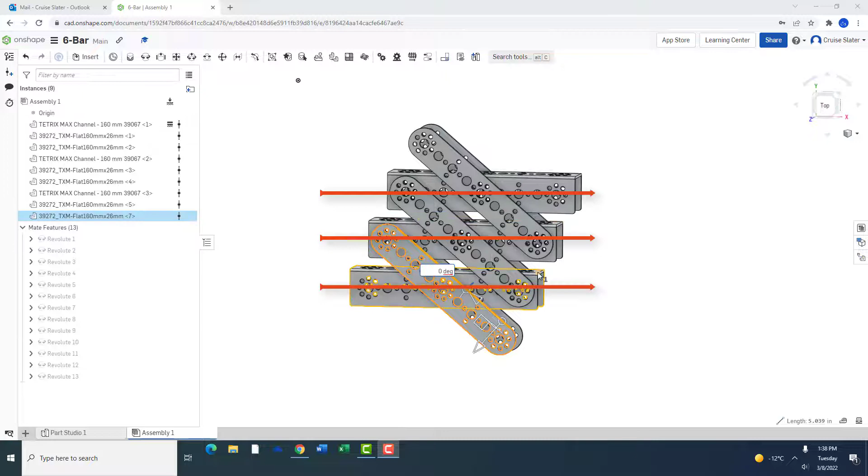And then I have 3 sets of diagonal parallel bars as well. And those bars are made out of the flats. Now, I don't have the washers and spacers and axles in here. I just have digital mates using Onshape. But the idea here is to understand the movement.

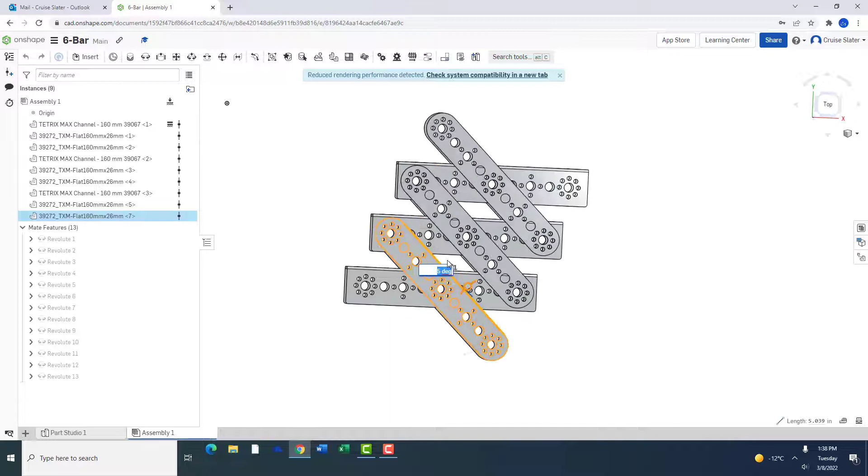So if I grab this piece right here and I use this rotational widget, we can see that the whole apparatus extends out. And the key feature here is that the diagonal bars stay parallel with each other and my horizontal bars stay parallel with each other. I will eventually reach the end, and in real life those would sort of butt up against each other and stop the movement. And we can see here that we have a minimum range and a maximum range.

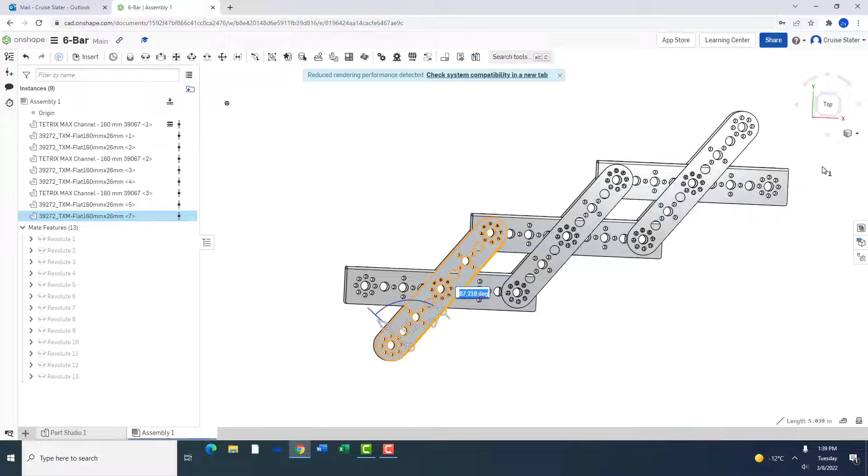So I can take something and build it compact, and then I could reach out and do something. So I can maybe have a gripper or a tool attached to the end over here. Alternatively, I could pivot this. I don't know if this will pivot it properly here. I could pivot it this way, and if I was to reduce the distance here between these two ends, so using my movement here again, we can see we can go vertical. So I could use this to operate some kind of vertical scissor lift.

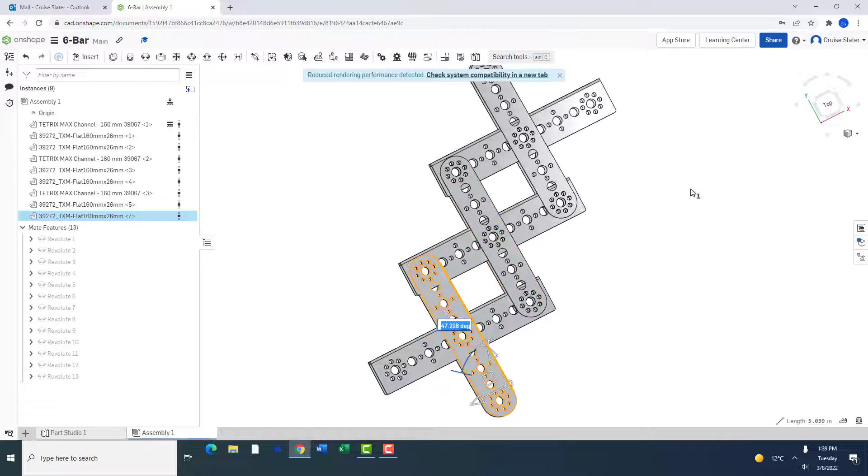I don't have it on the proper axis, but you can see that now my movement is vertical, not horizontal and extending out. So what are some of the key features here? Key features are symmetry. First time you're building it, it can help to imagine building it as squares. So if I rotate this a little more just to get that square shape, we can see that there is a symmetrical shape here. I get a square in the middle, followed by another square, and you can almost think of it like an accordion.

There are ways to build this without having equal shapes as you go through, so a more asymmetric approach. But as you do that, you have to be mindful of the loads that you're going to place on your system. So you have to think of torque and weight and what you're trying to do at the other end.

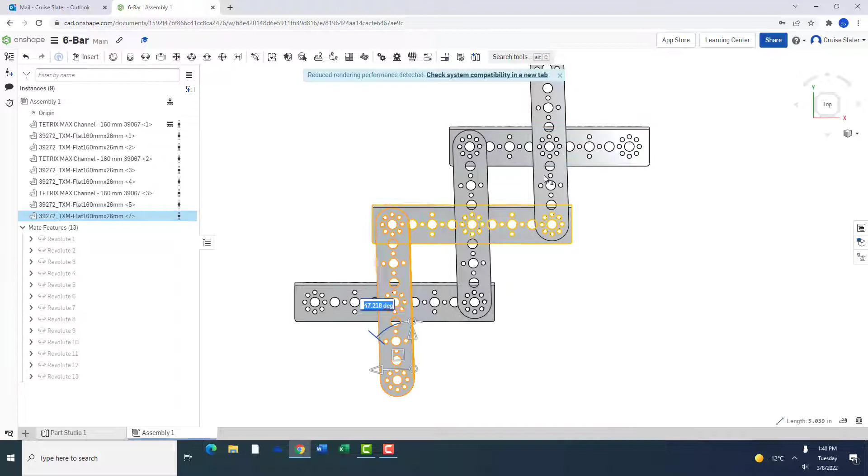Finally, when it comes to movement of this system, you can operate this pivot point with a DC motor, you can operate it with a servo, and how you do that is up to you. You can either choose to run a gear train to operate on this axle right here to create the rotational movement, or you can use a rack and pinion setup and a servo to decrease or increase the distance between this pivot point and this pivot point, depending if you want a more up and down nature or something more stationary.

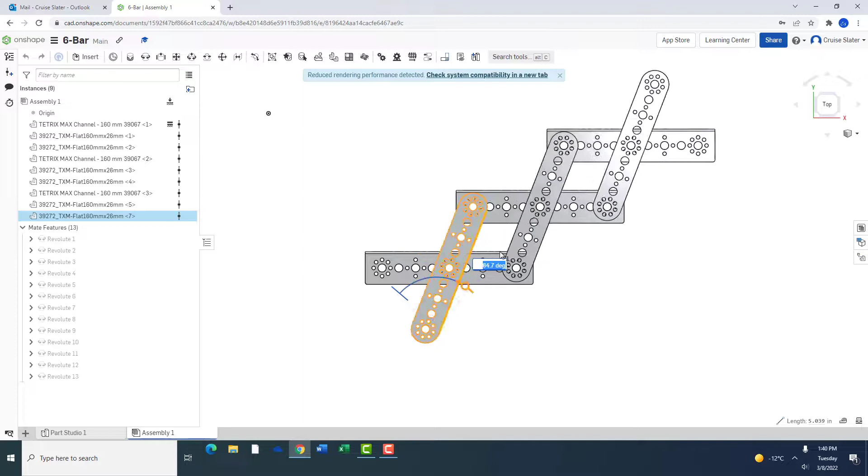I recommend when doing this for a gripping arm or something that rotates out to use a series of gears here and transfer axles to rotate this main pivot point here on the channel rather than creating a torque force here at the end. Okay, so just something to think about, something to look at.

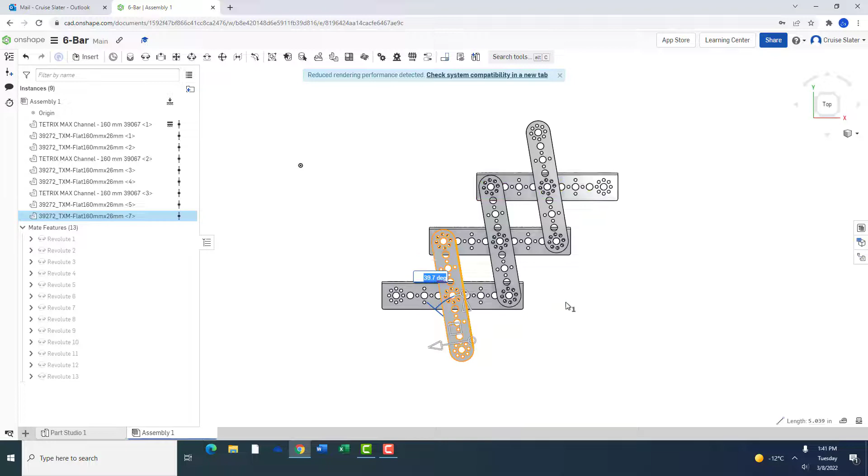Maybe you can try to build a 6-bar or a 4-bar lift just on your desk with parts. Make sure to use spacers and axles and the bushings and the hub collars, and just get used to how to build one of these and the movement that it gives you. Okay, so again, this is just a digital version. Feel free to build it in real life and talk to me about what you get.